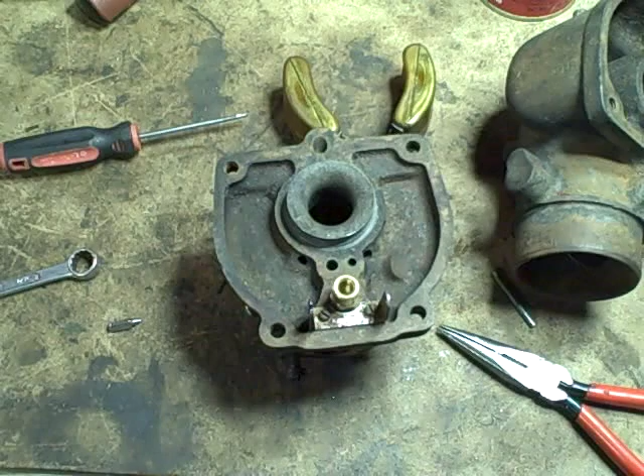All right, did some research last night and found out a few things. And I just wanted to talk a minute this morning about some of the things I found that might help people with problems they're having with their carburetor.

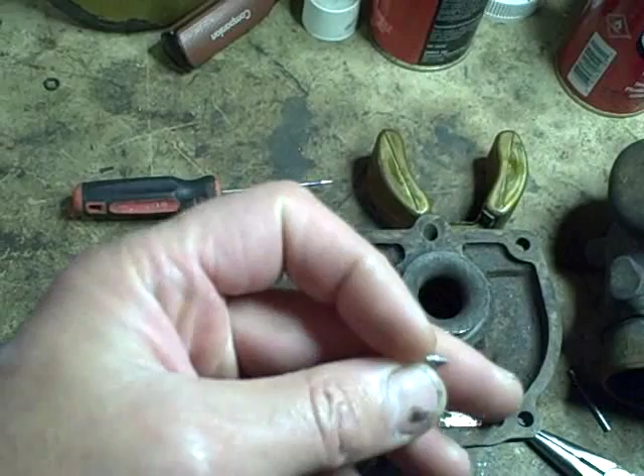This little float needle here is probably an original or a fairly early one because it's got the steel tip to it. A lot of the replacement float needles have what almost looks like a little rubber nipple tip on the end there. I think it's a Viton seal or some kind of fuel resistant, hopefully ethanol fuel additive resistant type of synthetic

rubber. And a lot of people say that makes a better seal. And then you got some guys that lament for the days when you could find the kits that had the solid steel ones because they believe this is the better way to go.

I guess one of the problems with the rubber tip ones is that you can end up with a problem where if the tractor is sitting for a while and the float bowl is full of fuel, for instance, say you didn't shut the fuel line off and you didn't let the engine run down, what'll happen is your float will be in the fully up position, which will be keeping this closed, and that little rubber nipple will be sitting in there, and it can actually get stuck in there.

So then what happens is when you go to run the engine, tractor runs, starts to use fuel, and then the bowl will actually start to go down, and that's supposed to allow this to fall out a little bit and let some more fuel in to replenish the bowl.

And what happens is that little rubber nipple is stuck in there, so this basically just stays in there. So even though the bowl moves down, this gets stuck in there, and then your engine starves for fuel, it leans out and then dies. So that's one potential problem with that.

Now, a lot of people notice that on the kits that have the little rubber nipple, there's a little tiny spring that hooks onto a little spot on the back of this, which isn't on this one. But if we had one of the ones with the rubber nipples, I could show you. It's got usually a slot with a little tiny spring that sits in there. And then the other part of the spring actually hooks onto a spot somewhere on the bowl here.

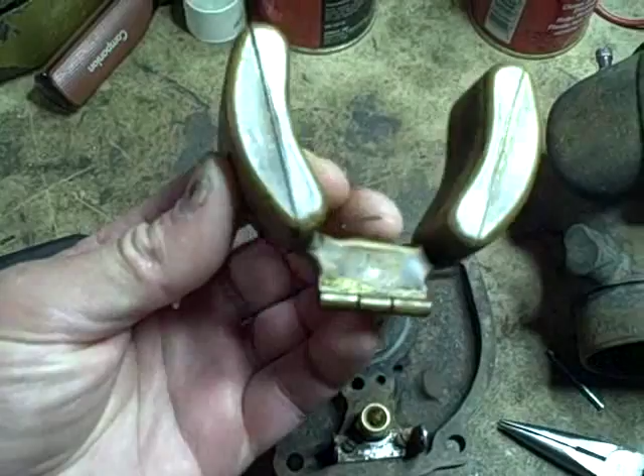And what that does is make sure that when this bowl tilts down, it gives a little pull on that needle and makes sure that it comes out. So that's what would keep it from sticking. So if you get a kit with a Viton tipped needle and it comes with the little spring, if you're replacing one of these old steel ones, you probably want to put the spring in. So that's what I wanted to talk about as far as that goes.

And then the other thing is a lot of guys talk about seating these. That goes back to this older steel style where you would take the needle and put it in like that and then tap it very lightly with a hammer. Give it one good tap. And the idea is that, theoretically, some guys swear by this, you're basically making a little tiny dent in the bottom of that seat that perfectly matches the shape of the needle here. Well, I don't know about that.

But problem is, some guys talk about doing that with the new rubber-tipped needles. Well, what happens then is you end up damaging the rubber tip. You tend to deform it in a way so that you can almost guarantee it's going to tend to get stuck in there or leak. So don't do that with the rubber-tipped needles.

Another tip that a carburetor rebuilder had posted, and it solved the problem for one guy, was that he had acquired a new kit, new seat, and he was having all kinds of problems with it.

And what they found in that case was that if you look really closely, from the top, you can see this is almost like a triangle shape. It's a three-sided deal. And these sides are actually pretty smooth and almost flattened out. And what he found was that on a lot of the newer kits, probably, I hate to be on the Chinese bashing wagon, but probably foreign made,

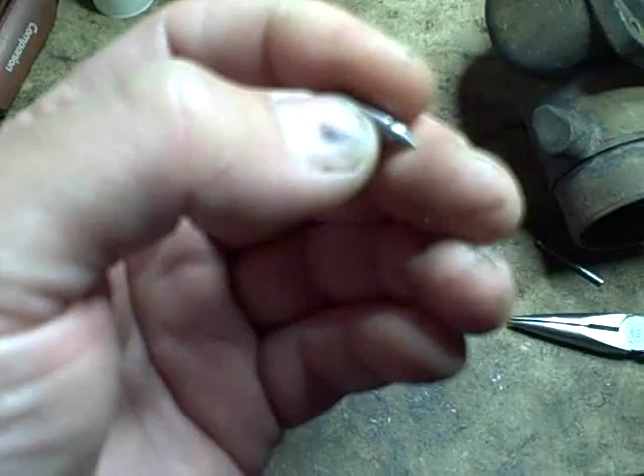quality control is not very tight, so what he ended up finding out was that on some of them, those edges were sharper and the clearance wasn't correct. So what would happen is they wouldn't just fall right out nice like this one does. And what he found was that he takes a little emery board and just kind of gives it a little quick file or rub down on the sides there on the corners, and that's just enough to improve the clearance so that they worked. So that might be a tip that might help somebody. So that's why I wanted to mention it.

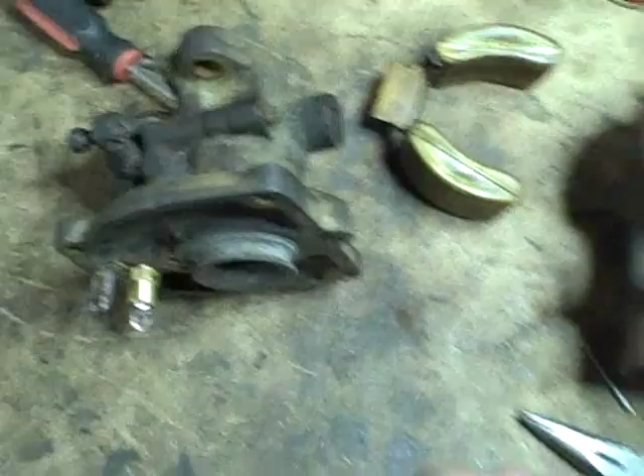All right, and one more quick tip I want to pass along that made sense to me when I read it, and that was somebody talking about a problem where their needle would be sticking if the tractor sat for a while. And their recommendation was that when you're done using the tractor and you're going to be putting it away for a week or longer. Of course, longer, there's other things you want to consider, but let's just say it's going to sit for a week. What you want to do is you want to shut your fuel supply off.

Typically at a sediment bowl, you're going to have a shut off there. And you want to shut the fuel supply off with the engine running and let the engine run a little bit. And when it starts to lean out, shut off the ignition switch. That has the effect of draining down the bowl on the carburetor to a low level. So now your float's going to be sitting down here and your needle's not going to be fully seated. The idea being if it's not fully seated, there's less of a chance of it being stuck. So that's the theory anyways. And you know what? There's no harm in that.

And it's always a good habit to get into of shutting off your fuel shut off at your sediment bowl, or if you don't have one, you can put a little inline ball valve in there. It's always a good habit to get into because you don't want a situation where you walk away from the tractor and think that your bowl's perfectly fine, and then for some reason it doesn't seal right and gas pours out all over the place. Or worse yet, gas gets into your crankcase. So that's pretty much it for the tips that I picked up last night that I'm going to try and commit to memory and wanted to pass on.

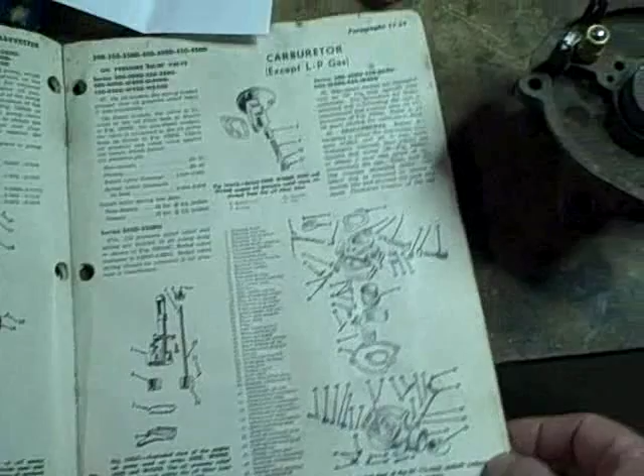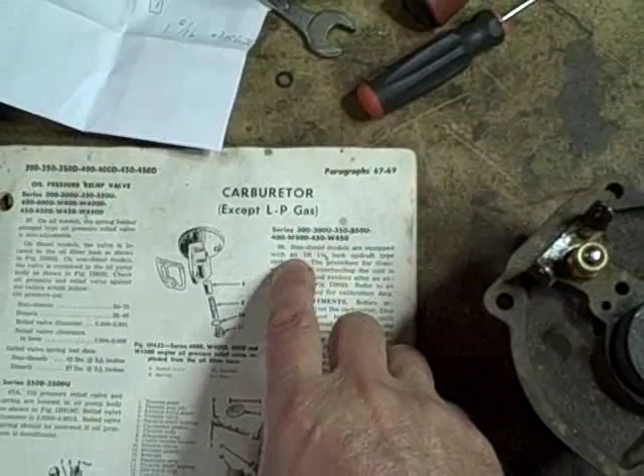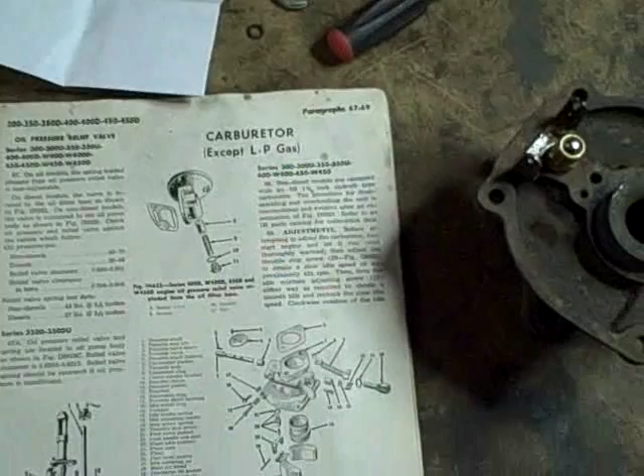Alright, so I've got the I&T manual for the International Harvesters, which has a lot of good information in it, but it doesn't have anywhere near as much information as you would get with a full service manual. Not only that, but here it says non-diesel models are equipped with an IH 1 1/4 inch updraft type carburetor. Correct. The procedure for disassembling and overhauling the unit is conventional and evident after examination. Refer to an IH parts catalog for calibration data. Well, I don't have a parts catalog, and if I go on the Case International website, I can't find anything in the online parts catalog that would tell me what the heck to do here.

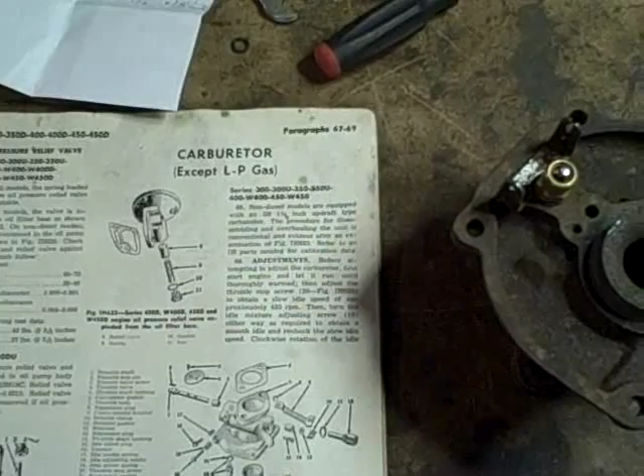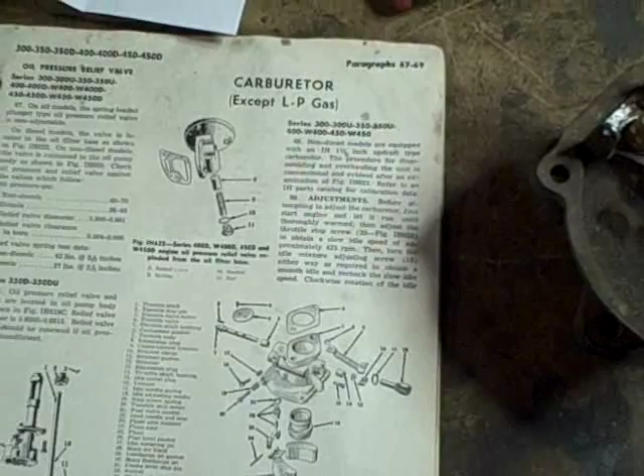So then I just kind of Googled around looking for float height adjustments on this carburetor and just IH carburetors in general. I did have another bit of literature that the guy gave me with the tractor. It was actually a bunch of photocopied pages from, it looked like, an original service manual. The problem is he didn't know what he had for a tractor. So that service manual covers a bunch of models, and the closest thing to what this tractor actually is

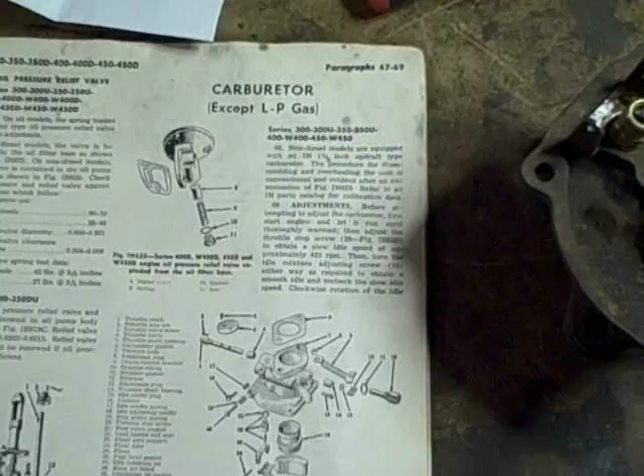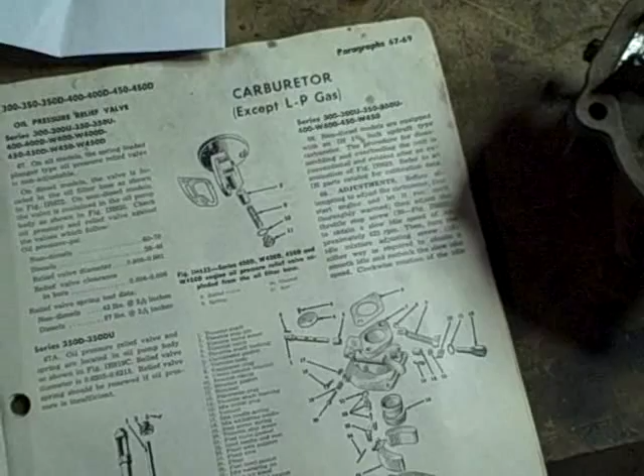it references a Farmall 340. So I went and looked in that section on the Farmall 340, and it talks about how there were several different carburetors used, and of course they're all Zenith or Marvel Schebler. It doesn't even talk about International Harvester carburetors, so I think that might predate this tractor. This tractor's a 58, maybe the 340 was early 50s or something. And maybe back then, IH wasn't making their own carburetors.

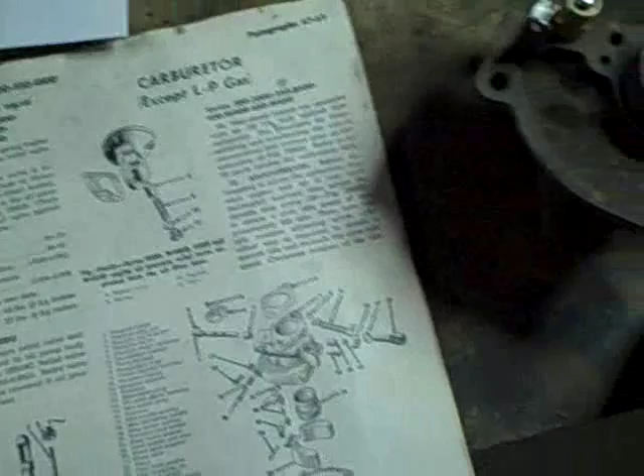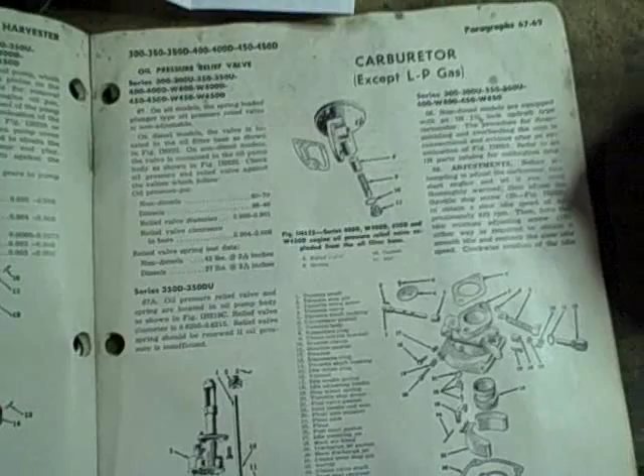So what it did say, though, was that all of the different versions of those carburetors used back then on the 340 were, I believe, 1.25 inch updraft carburetors, so similar style carburetor. Whether they were Marvel Schebler or Zenith, they all used a 1 5/16 inch float height adjustment, which is a decimal of 1.3125, which I'll get to in a minute. So I'm going to see how close the current float height is to this if all else fails.

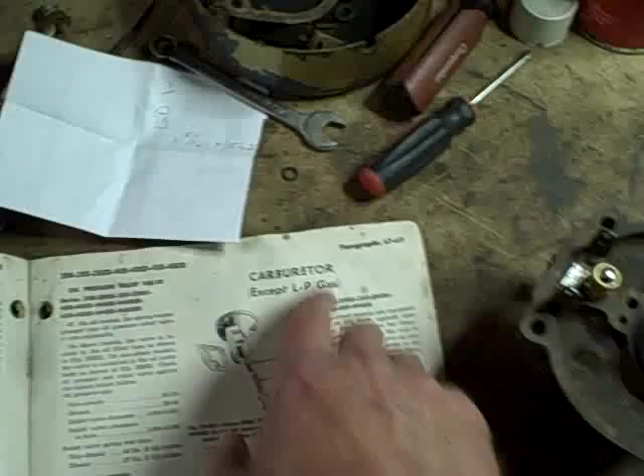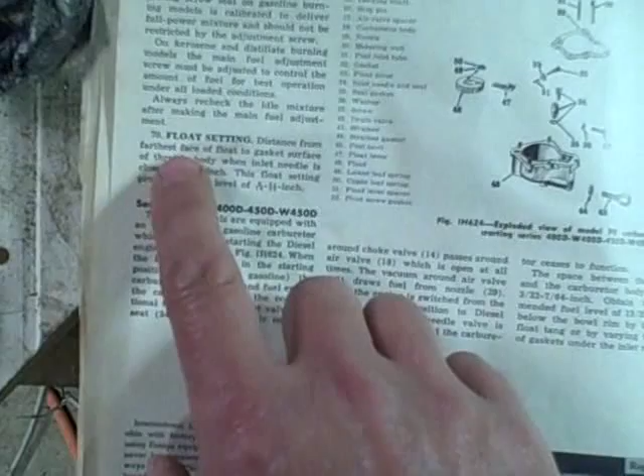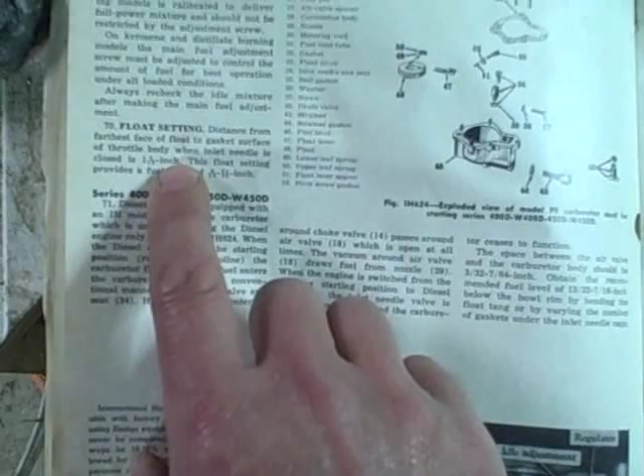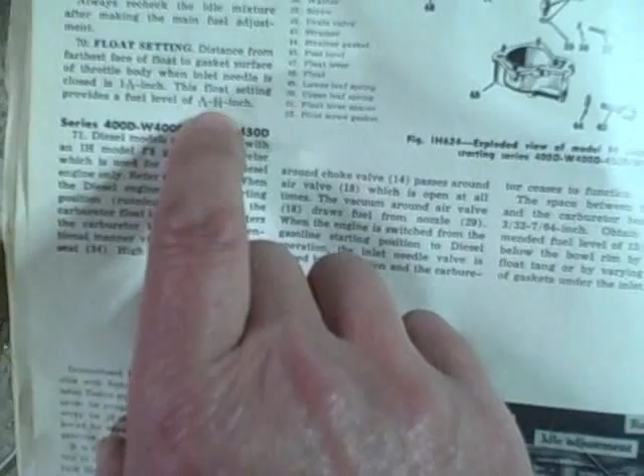But for right now, what I've got on the next page in the I&T manual is float setting: distance from farthest face of float to gasket surface of throttle body when inlet needle is closed is 1 5/16 inch. Okay, so that jives with what I found on those other ones. Good. This float setting provides a fuel level of 9/16 to 21/32 inch.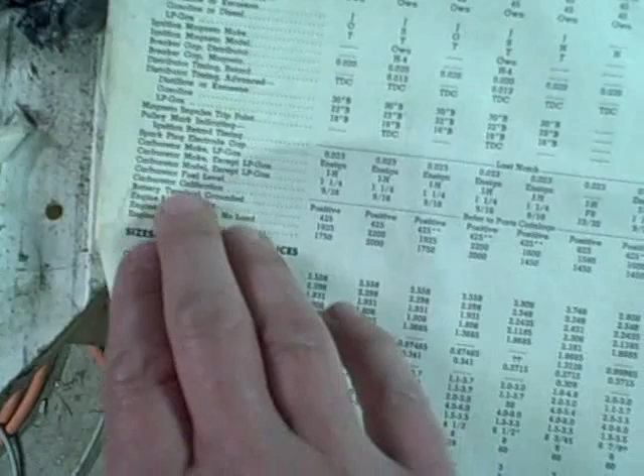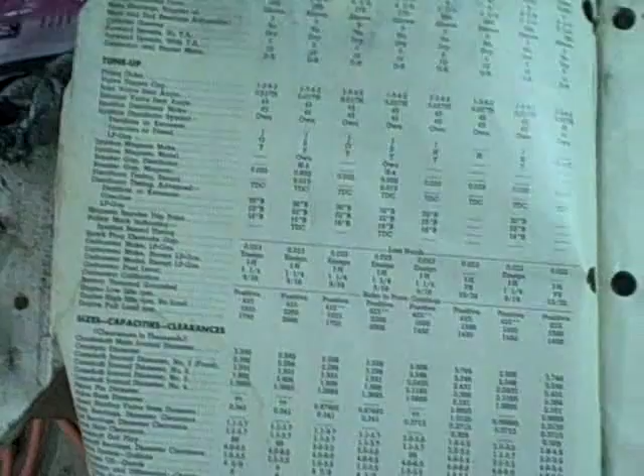Aha! All right, so that makes sense because in the front of the book here we've got condensed service data, and under the tune-up section there is carburetor fuel level, and it says that for all models covered in this book, including the 350U, the fuel level is 9/16 inch. I didn't understand what they were talking about. Now I kind of understand.

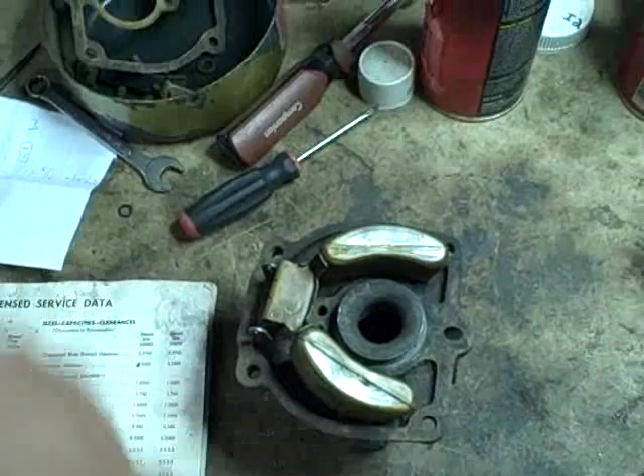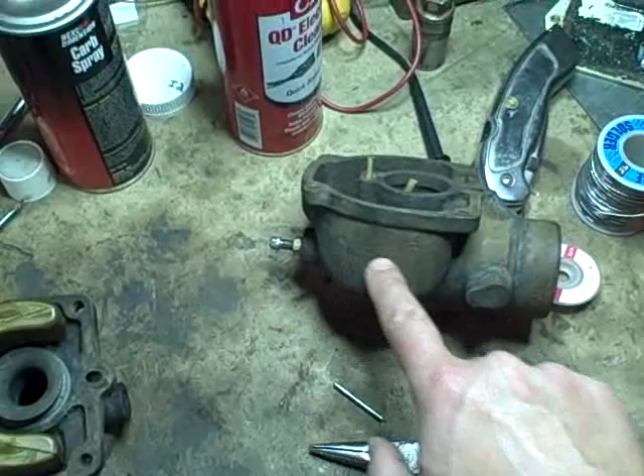So what they're saying is, if we set the bowl height to 1 5/16 inch, and that's with the needle closed, when the tractor's running the bowl's going to keep allowing fuel to come in to maintain a fuel level of 9/16 inch in the bowl. In other words, from the bottom of the bowl up to 9/16 inch, that's where your fuel level should be sitting. If it's set too high, you're going to start pulling more fuel up through these passages than you want to, and the thing's going to want to flood out or run way too rich.

And then, of course, if your fuel level is much lower than 9/16 inch, you're going to have a problem where it's not going to draw properly. It's going to lean out or not run at all. So that's why we want to keep that fuel level at 9/16 inch, which we do by setting our float bowl at 1 5/16 or 1.3125. So I'll show you how we're going to do that now.

Okay, first step is, of course, reinstall the float with the hinge pin. And now, where do you measure from? Well, we're measuring from the gasket surface of the top of the carburetor body. So that's this surface here. We're measuring from that surface to the highest point on the bowl.

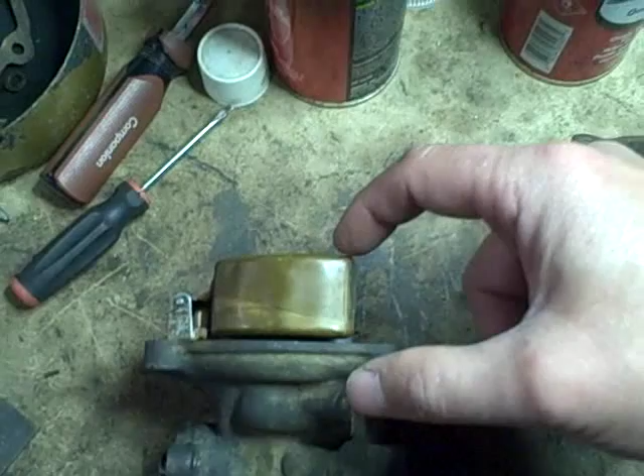So if we look at the bowl from the side, you'll notice that we've got this little tip right here because this is at an angle. This is going to be a little bit further away from here than this point is. So we're going to measure from here to here. And we want this distance from here to here, right there.

We want that to be 1 5/16 inch on both bladders. So in other words, I'm going to check it on this side, and then I'm going to flip it around, and I'm going to check it on that side.

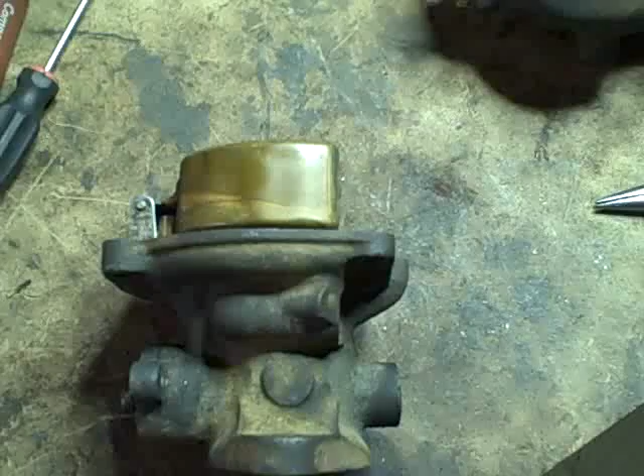Now, I can't find my vernier caliper right now. So that bothers me because I use the damn thing a lot.

But for now, what I'll do is I'll just use this metal scale, machinist scale, and I will find where the heck on this thing 5/16 is, and then we'll do a measurement. And basically all we're going to do is hold this right on here like that and figure out where we are. So let me just check. I got to put this down so I can see the tiny marks.

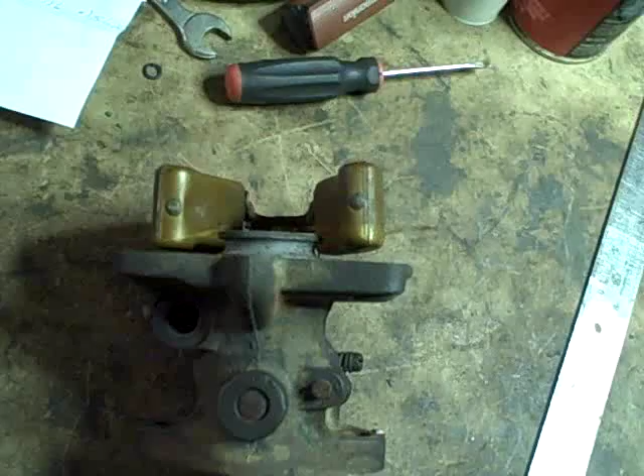All right, so I see I've got a problem right here. When I look at this dead on, you can see that this bladder is definitely higher, and it's also kind of pushed out to the side. That's not good at all, because not only is that going to give me a height mismatch, this is obviously higher than this side.

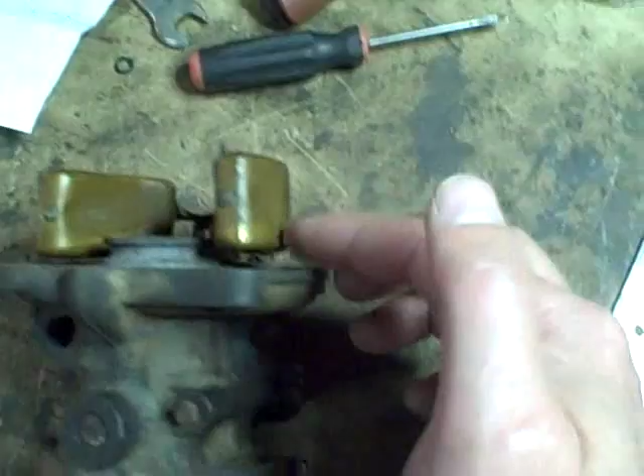The other problem is when it's torqued or twisted in that fashion, you can actually get a problem where the side of the bladder will actually rub on the inside of the bowl and cause it to hang or stick, and that'll just give you all kinds of fits. So you gotta make sure that that's not the case. So I'm going to try and rebend this one back into position gently.

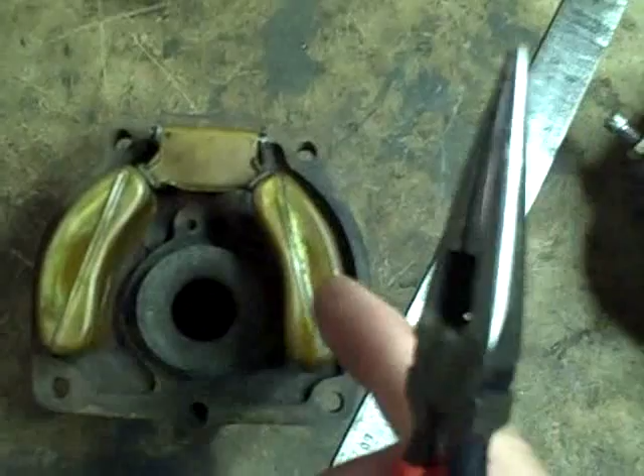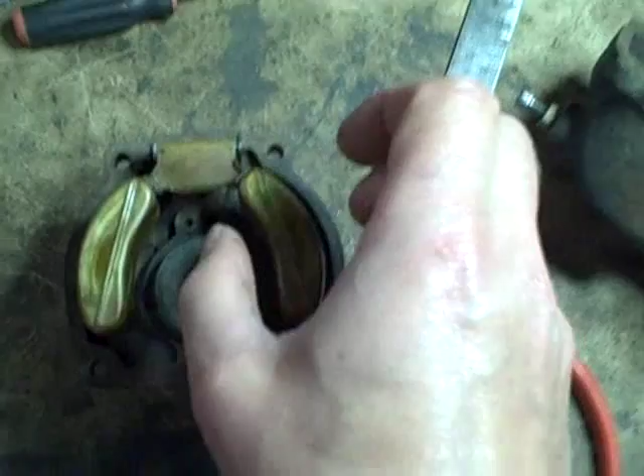So how I'm bending this is I'm going to take needle nose pliers and I'm going to grab as close as I can, and this is the point where I'm trying to bend this back or twist this back down into position. Very important that you don't try and grab just the bladder and turn or twist the bladder, because you can actually break it right off where it's soldered onto the arm here.

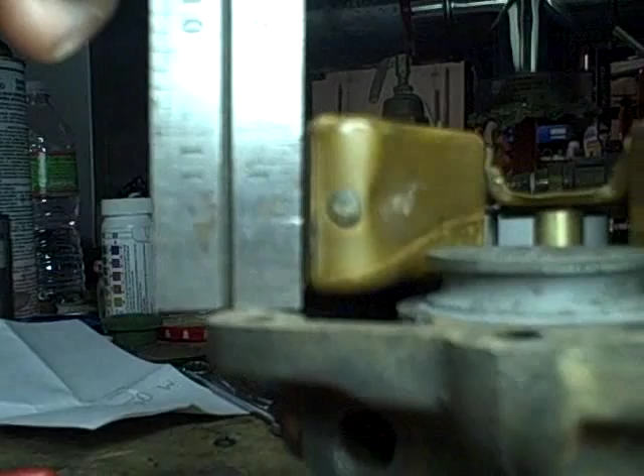Okay, I gave it one minor tweak and I now have it close, but I can still see that this one on the right is still a little twisted. Alright, so I'm not sure how well this is showing up on the camera, but now I've got that float set to 1 5/16 of an inch, and this one here is also 1 5/16 of an inch. So now I've got my height correct. So now I've just got to check the alignment.

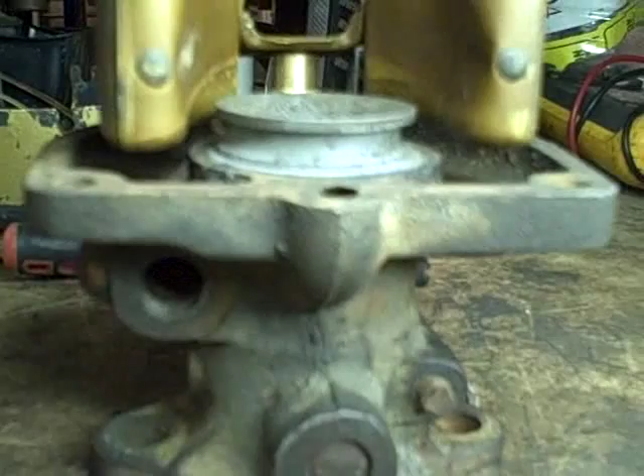I'm going to put it in the bowl and carefully listen while rotating the bowl back and forth to see if I can hear any scraping. Alright, even just putting the bowl on as I was sliding it down, I could definitely hear some rubbing. So what I need to do is I need to figure out which way I need to tweak these bladders so that that stops.

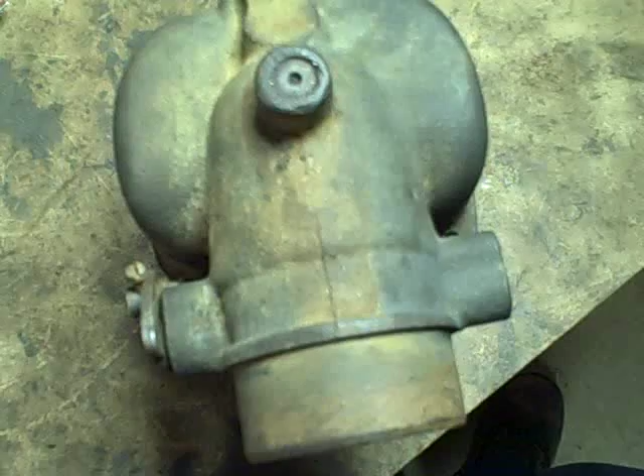Looking down, it looks like the clearance on the inside here on this bladder is really tight, and I've got more room on the outside here, so I would say initially this bladder right here is probably rubbing on the inside here. So let's try and adjust that. Alright, it's getting better, but it's still not giving me full movement, and when I just went to pull up on the bowl a tiny bit, I heard the float fall back down, so I know it was sticking again.

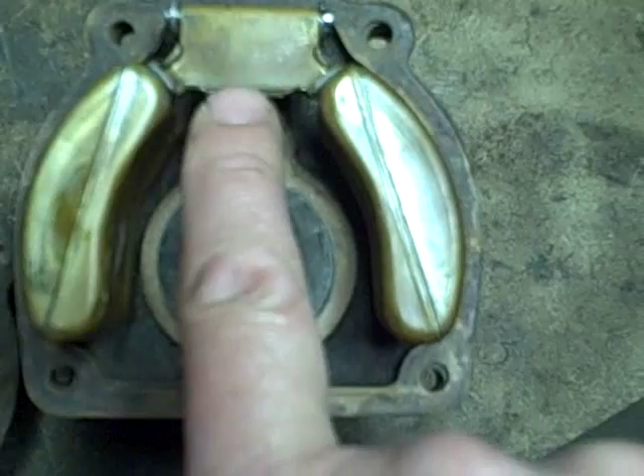I'm starting to wonder whether or not this metal part right here, this tang that is bent downward, is what's rubbing. Because it looks like I've got good clearance on the sides, but it's still rubbing like a son of a gun. So I'm going to bend this back vertical to where it should be. There, now that's not flared downward, so I'll try it again.

Another thing you can listen for is as you're sliding the bowl back into place, if you do it very carefully and you keep the holes lined up as you're lowering it, if you hear that kind of telltale scrape sound of the cast iron bowl on the light brass metal of the float, then you pretty much know it's probably going to be rubbing a little bit. So you can back it off and then recheck your clearance. But I think I've got it.